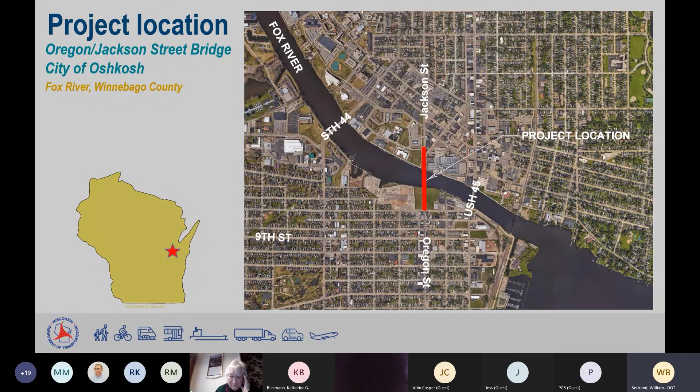The purpose of our project is to continue providing a safe, reliable crossing for Oregon-Jackson Street across the Fox River, and any improvement needs to address structural and geometric deficiencies of the existing bridge to maintain safe access for all users of the bridge that include not only motorists, but bicyclists, pedestrians, and also waterway users. And then we would also look that our improvement alternative would comply as much as possible with state, regional, and local plans, including any city redevelopment planning.

A little bit of background and history. The existing bridge was constructed in 1956. Generally, we look at about a 75-year life for a bascule bridge, so it is getting to the point where it's nearing its service life.

There was a report that was done back in 2012 that showed a number of bridge deficiencies that needed to be addressed. We did begin an environmental study back in 2015 that included some early stakeholder meetings to help identify some critical local issues. And on the right side of the current slide, you can see a number of stakeholder meetings as well as local official and public involvement meetings that have occurred thus far in the project.

The study was suspended in 2017. At that time, we reevaluated the bridge condition, and it looked like we could gain an additional 6 to 7 years of bridge life at that time. So we tentatively delayed construction to a 2028 timeframe with the idea that we would relook at the condition of the bridge in early 2021 for the potential of restarting the study.

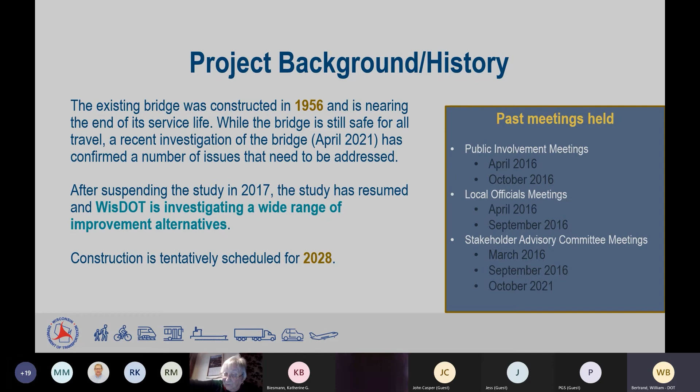Our design team did do a survey and inspection of the bridge in April of 2021 with our region bridge engineers, confirmed that 2028 construction was a reasonable time frame given the condition of the bridge. And in the summer of 2021, we did then resume our environmental study.

The project is needed to improve and address a number of areas, bridge deficiencies in operation, which go hand in hand with safety. I'm not going to go into detail on the bridge deficiencies that exist out there. Our project website, which again is shown at the end of the presentation, does include a little more detail on the bridge deficiencies, but suffice to say the movable bridge machinery is showing some signs of wear and corrosion, and it is in need of replacement.

The approach spans and sidewalks also are in need of repair, and there is some cracking and spalling on concrete surfaces underneath and the bridge piers. As part of a lot of our early outreach back in 2015, again with the stakeholder groups, there were four areas that really were identified by that group and confirmed in talking with local officials that needed to be addressed by any improvement alternative.

The first area was improving bicycle and pedestrian accommodations. Any new bridge, we look at a 6-foot sidewalk width being standard. The existing bridge has 5-foot sidewalk width on the approaches, and across the center or bascule lift span, it's actually less than 5 foot. So any of the new bridge alternatives that we will be discussing tonight do include not only 6-foot sidewalks, they also include 5-foot bike lanes on either side of the travel lanes.

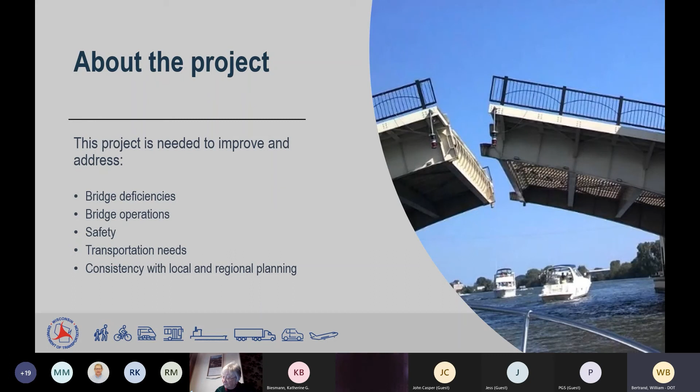And then the last area that was identified as a need was that any improvement alternative needed to minimize impact to development, and that would be both existing development out there today as well as proposed development that may occur in the future.

So at this point in our study, we're looking at 10 remaining improvement alternatives that are under consideration. There's a wide range within those alternatives. They range anywhere from a no-build alternative to a rehabilitation alternative, and then there are 8 replacement alternatives, 4 of which are high-level fixed bridge alternatives, and 4 of which are lift bridge alternatives with a navigation channel in the center of the river with a span that opens and closes.

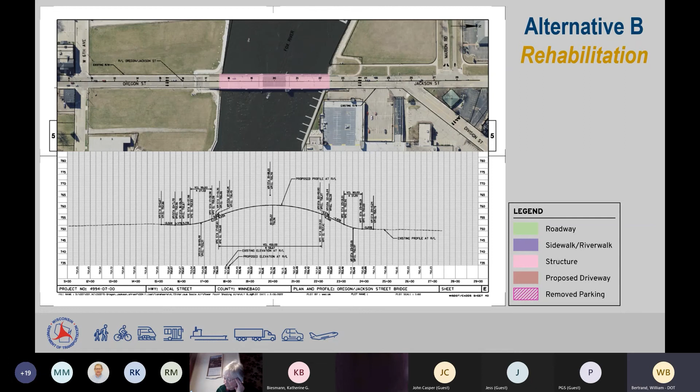It is worth mentioning that under this alternative, the state or the Department of Transportation would maintain bridge ownership, and we'll get a little bit into how that compares to other alternatives with a slide later in the presentation. But also this alternative has roughly a 25-year lifespan with it. At the end of that 25-year life, we would then be looking at the need for a replacement alternative.

We'll get into now the 8 replacement alternatives. Before we get into in detail the alternative that's shown on the screen, we'll mention that what the 8 replacement alternatives have in common is that they all have a 4% profile on the approaches, which is generally considered the maximum for vehicles that are stopping or decelerating in advance of a stop condition. The existing grade on the bridge today is 4.8%. So any of the 8 replacement alternatives that we discuss will be an improvement over the existing condition.

Also, any of the 8 replacement alternatives do, as we mentioned before, improve conditions for bicycles and pedestrians. They do have 5-foot bike lanes, 6-foot sidewalks. At a minimum, all 8 replacement alternatives improve navigation clearance by a minimum of 2.2 feet to make it consistent with the Wisconsin Street Bridge to the west. And 7 of the 8 replacement alternatives provide a grade separation for the Riverwalk on both sides underneath a new bridge. Also, for any of the replacement alternatives, the city of Oshkosh would assume ownership of the bridge after the replacement. And again, we'll touch on that a little more later in the presentation.

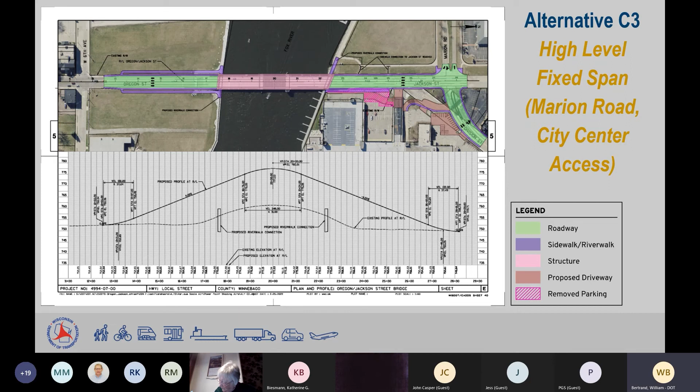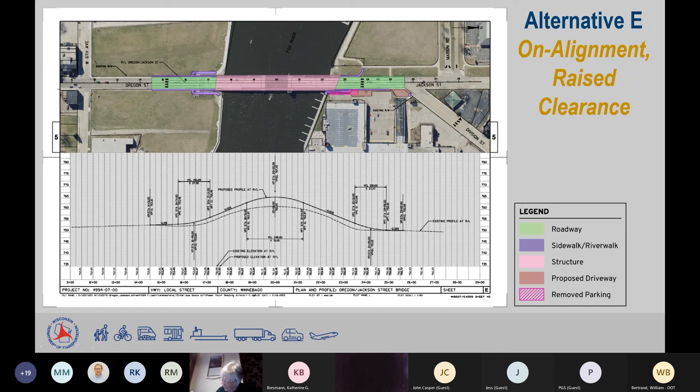The next alternative is another lift bridge option. It's alternative F as it's labeled. Looks very similar, at least from an aerial view, to alternative E. The difference here is that we are raising the elevation of Oregon Jackson Street in the navigation channel by an additional foot. So it's roughly 3.2 foot additional or improved navigation clearance. What that does is gives the clearance that we need to fully grade separate the river walks on the north and south side of the Fox River.

So on paper, this has the additional benefit over alternative E of the Riverwalk separation with very similar otherwise construction impacts. The one change here, certainly looking at access again to Beckett's and City Center. The Beckett's driveway, while it would still remain direct to Jackson Street, it does shift actually up to the location of where the parking ramp currently exists today, and we would provide a short offshoot from the parking ramp access to serve the Beckett's parking area.

So the front row of parking for Beckett's is shown crosshatched as an area that does lose some parking under this alternative. The parking on the south side does show a net loss of 16 parking spots. Again, north of the parking ramp, we have no change to the parking impacts. So with alternative F, there's a net loss of 16 parking spots overall.

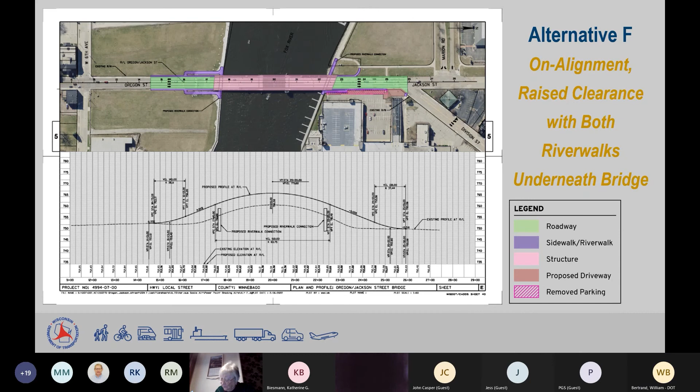We'll move on to alternative J1. This is again another bascule or lift bridge replacement option. So the span again in the center of the river would raise and lower similar to what it does today. The real push behind this option was looking to minimize the impacts to traffic during construction.

This is similar to a concept that was done in Winneconne recently, where that lift bridge was replaced on new alignment. The idea behind it is that the bascule or the lift span in the middle of the river takes 2 years to build, and the approach spans really only take 1 year to build. So by putting the lift span on new location, while the overall construction will take 2 years, the first year of construction is on new location and doesn't impact existing traffic.

This is also similar to what's ongoing right now in the city of Menasha with the Racine Street Bridge in that construction project. This alternative, even though it's on new alignment, the southern construction limits do stop roughly again halfway between 6th Avenue and the South Bank. On the north side, due to the realignment, our reconstruction limits do extend through the Marion Road intersection. So we would be, again, reconstructing Division, realigning Division to form a new intersection with Jackson and Marion Road.

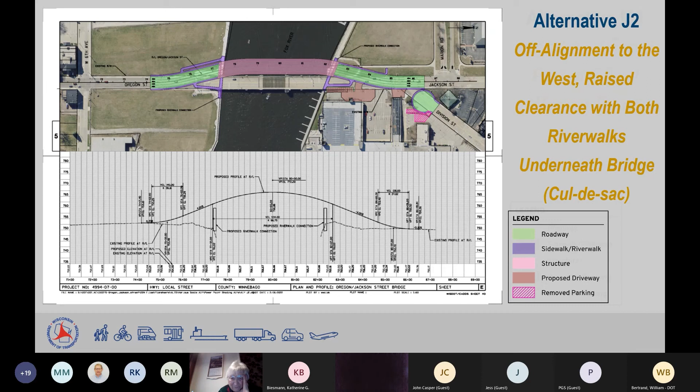The last 2 of the replacement alternatives that we will discuss are high-level fixed alternatives that are what we call on a partial offset. And these are both alternatives that were relatively recently developed. The idea behind this alternative is we did not hear a lot of negative comments from either the public or the local officials about a 2-year overall traffic closure with a replacement alternative in the earlier study. And a lot of that is likely due to the fact that the Wisconsin Street Bridge to the west and the Main Street Bridge to the east provide alternative options for river crossings very close to Oregon Jackson.

So our thought being, if the 2-year closure was not as big of an issue as we thought it might be, we were going to look to more split the right of way with this option to move away from Beckett's in the city center, but not so far that we would require additional real estate along the west side of the roadway.

So we're still not requiring or needing to acquire any right of way on the west side, but we're shifting the roadway 20 to 25 feet to the west to minimize impacts on the Beckett's and city center property. Again, with this alternative, we are looking at a 23-foot navigation clearance that we have validated with the Coast Guard. Mentioned again a 2-year closure, realigning Division Street to form a new intersection with Marion Road.

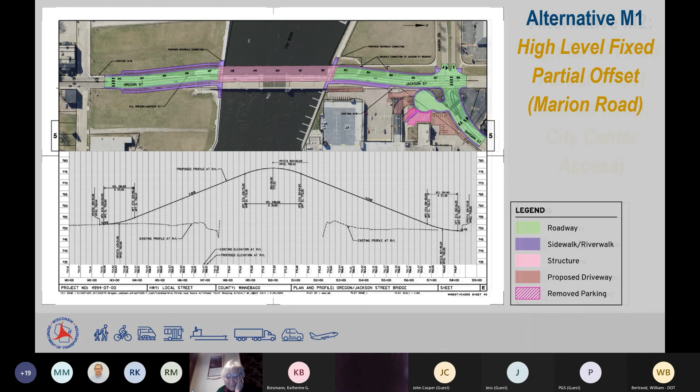Alternative M2, another high-level fixed option, very similar to the previous. And again, I won't go through again what's similar to the previous, but the differences here is how we provide access again to Beckett's and City Center property. Similar to alternative C3, we're looking at a direct access to Jackson Street for the parking ramp, but this again is going to be in the vicinity of 7 to 7.5 feet above existing ground where it meets in with Jackson Street.

So there will be again retaining walls along both sides of this access that comes to the parking ramp. There will again be a driveway for Beckett's that comes off of this parking ramp access and gradually comes down to existing elevation with retaining walls again along a portion of the drive.

The area in pink, again showing lost parking. We are looking at a net loss of 13 parking spots on the south area, due again primarily to the fact that we're above existing ground and need to bring the Beckett's access gradually down to existing elevation. And then on the north side, we're actually able to gain 5 spots. So overall, alternative M2 does limit the parking spots lost to 8 spots lost.

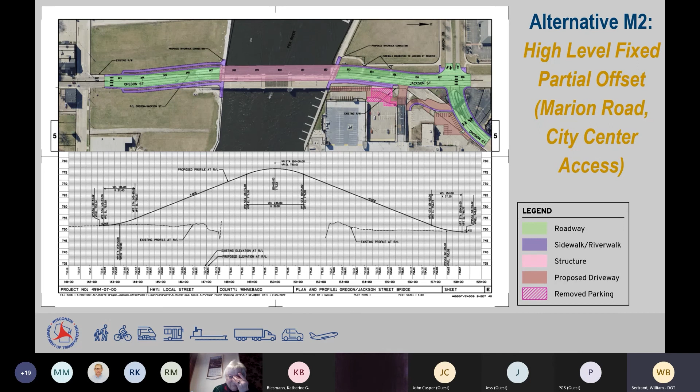So that's a lot of alternatives that we went through, a lot of various details. What we've tried to do is to use one matrix or one spreadsheet that shows all the alternatives and the benefits, pros and cons for each of the alternatives, comparing them on one sheet of paper. What we have on this slide does also show the alternatives that were developed back in 2015 and 16 and have been removed from the study for various reasons.

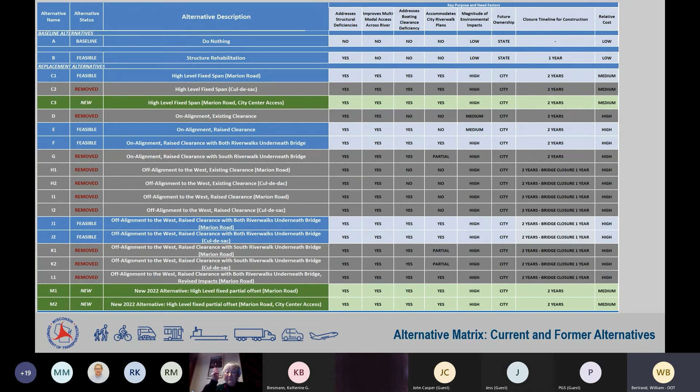So there's a lot going on here, but we did want to at least show that there were a number of previous alternatives that had been investigated. This matrix can be viewed on our design website, which is shown in the last slide. But for ease of reviewing things tonight, we're going to move to the next slide, which condenses the matrix to just the 10 alternatives that are remaining.

The alternatives that are shown in blue background are alternatives that were developed during our study in 2015 and 2016. The alternatives that are shown in green background are the 3 alternatives that have been developed within the last year since we've resumed our environmental study. The areas that we looked at to compare the alternatives one against the other really go back to starting with the stakeholder items, the 4 items that were developed from that stakeholder group, and 3 of those 4 were multimodal access across the river, navigation clearance, and accommodating the city riverwalk.

So you can see in the matrix that 3 of the first 4 columns here really address those areas and how each of the improvement alternatives do address those areas. The alternative A, do nothing, and the structure rehabilitation option do not improve in those 3 areas, while of the 8 replacement alternatives, option E for the Riverwalk is the only alternative that falls short of accommodating and getting a yes in the column for these 3 areas. Magnitude of environmental impacts really is looking at impacts in the water, impacts to adjacent property, change in aesthetics or landscape, future ownership.

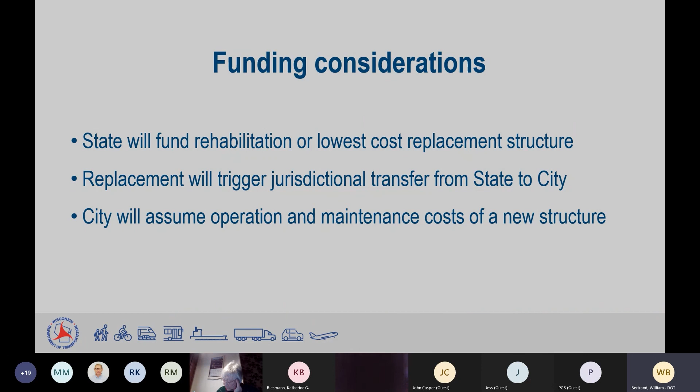To give a little bit of an idea on the overall schedule, we mentioned not just the environmental study, but also subsequent stages. We did start the environmental study back in 2015, suspended work from really late 2017 to mid 2021. Now we've resumed that study. We are looking to have a draft environmental document by the summer of 2023, working toward approval in early 2024.

If real estate is required with the alternatives that would move forward, we would look at likely late spring of 2025, starting real estate acquisition. And we have a 2-year window to acquire real estate so that the acquisition would be complete by late spring of 2027. And that would allow time prior to construction for any utility relocation. So that year gap is not really a gap because there are utility relocations that would be occurring.

And then with construction starting in the summer of 2028. Again, any of the replacement alternatives, we're looking at roughly a 2-year construction window. So probably late 2030 is when we would look to be complete with construction.

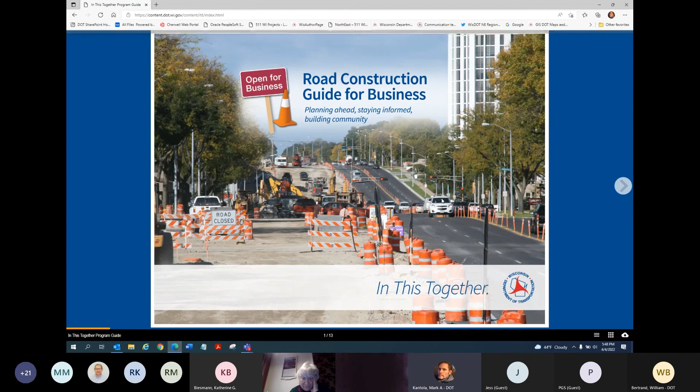Perhaps the biggest change is this new road construction guide for businesses. It's a multi-page interactive guide that brings you from the beginning design, like we are here, all the way through to the end of construction. I won't go through every page, but we do have a roadmap here, and it's important to organize early. That's what we're doing right now. With you here, you're organizing and getting ready for the project, learn more about the project, develop questions for project staff.

And then as we move along in design, when the alternatives are broken down a little more and then chosen, you want to stay engaged with the project so you know the exact traffic issues that are going to come during construction. And then as you go along, you want to make sure that you develop an action plan or a game plan for when there is construction. So how do you do all that? We kind of basically bring you through it with a lot of different resources.

Just as an example, a lot of people forget their suppliers have big trucks. If they're in a construction zone, even if it's not a road closure, sometimes the lane widths are smaller. So you want to make sure your suppliers know. Again, excellent tips and advice for whatever your needs are.

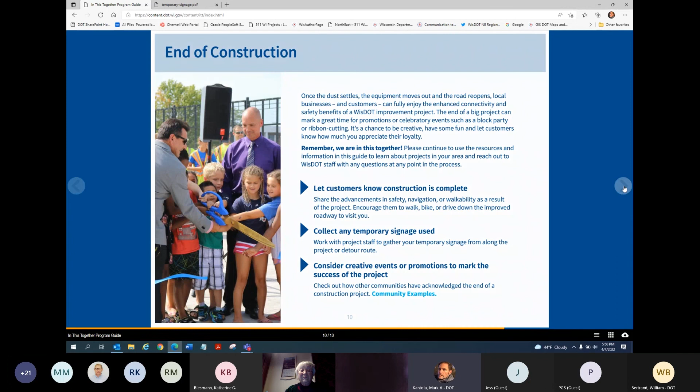And then the rest of it is just some more success stories, talking about the end of construction, some tips and ideas for your business or organization, some more resources, a planning guide for a life cycle of transportation, all the way from the beginning where we are now through the end, and then through to maintenance of the structure. And there's just some numbers and some other places you can go to get some tools, tips, and ideas if construction's gonna impact your business.